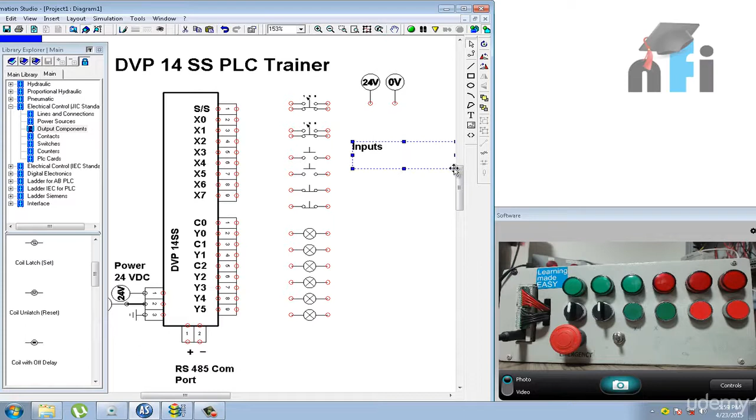So starting with the PLC make. This is Delta PLC 14SS. Now this 14 represents the total number of inputs and outputs. So these are the inputs. I can also write it here. These are my inputs. Now inputs in this PLC are designated by X, starting from X0 to X7.

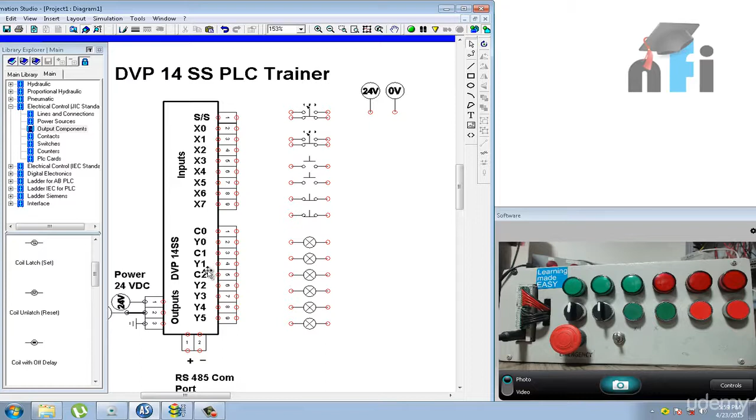So let me just put these names as inputs, and these are my outputs similarly. Now outputs are signified by Y: Y0, Y1, Y2 and up to Y5. These are my outputs. So in PLC we have inputs and outputs, and in this trainer, if you see here, this is the PLC trainer. You can see the inputs and outputs from here.

All right, these are the inputs. Let it focus. Yeah, these are the inputs starting with SS. Now this SS is sink source. I will explain to you what that is. And the inputs are X0 to X7. So we have 8 inputs.

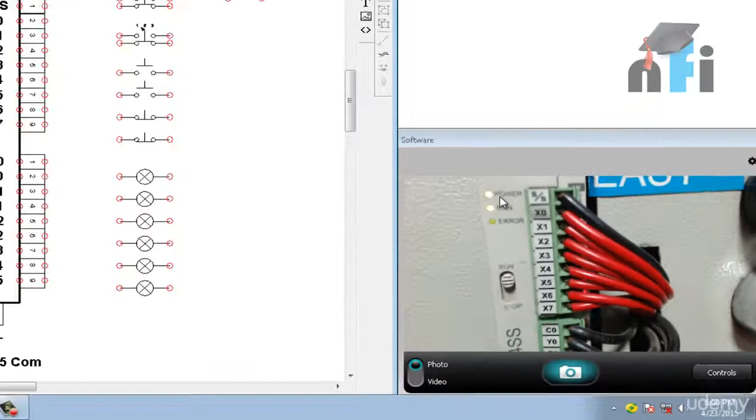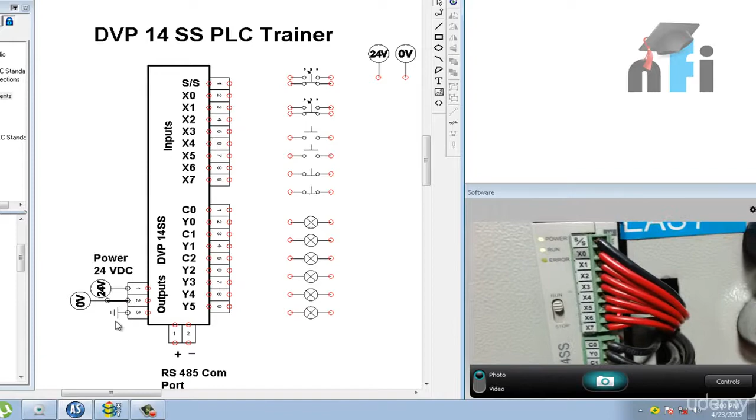And here we have a power LED. This is the power LED, this is the run LED, this is the error. So the PLC is powered. The PLC has been given a power of 24 volts and 0 volts. This is a DC power supply. This is the earthing. And the PLC is right now in run mode.

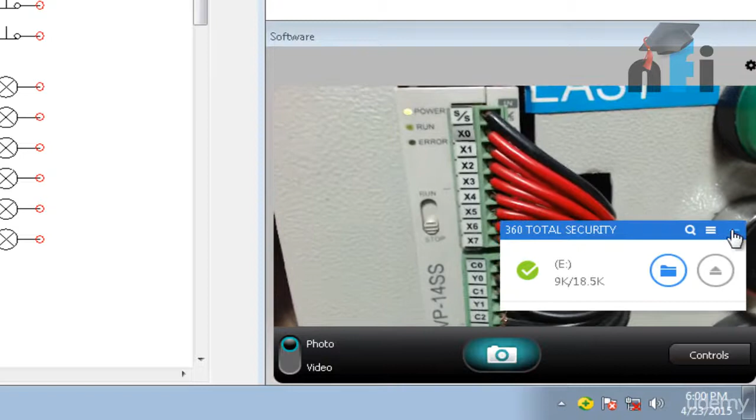So we'll see what the run mode is. Otherwise you can see this slider. This is at the run position. So the PLC is running. If I slide that to stop, the PLC will stop. Excuse me for that. So the PLC is in run mode right now. And you can also put it in stop mode. This is stop mode. Now this is run mode.

This is DVP14SS. These are the wirings going to the inputs, and these are going to the outputs. So in outputs we have C0, Y0, C1, Y1, C2, Y2, Y3, Y4 and Y5. The same has been depicted here. I'll explain from this diagram how I have connected the inputs and outputs to this PLC.

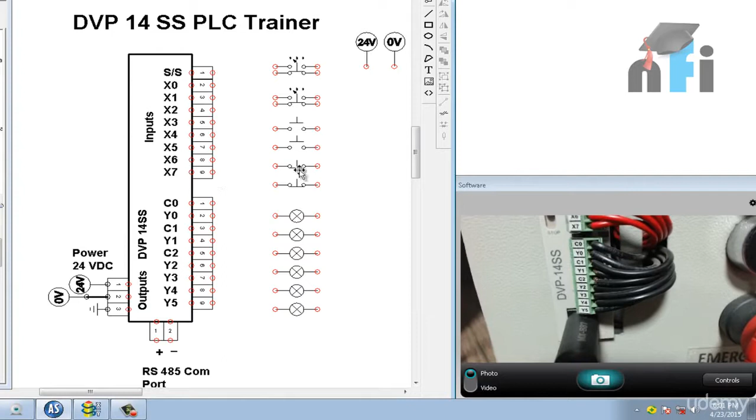In this trainer, these are the indicators, 6 indicators, and these are the switches. Now this is a 3-way switch. It goes like this: 1, 2 and 3. So we have two 3-way switches here. I have taken two 3-way switches, this one. Then I have an NO switch.

These are the NO switches. 2 NO switches and 2 NC switches. The symbol of the NO switch is this one. The symbol of NC is this one.

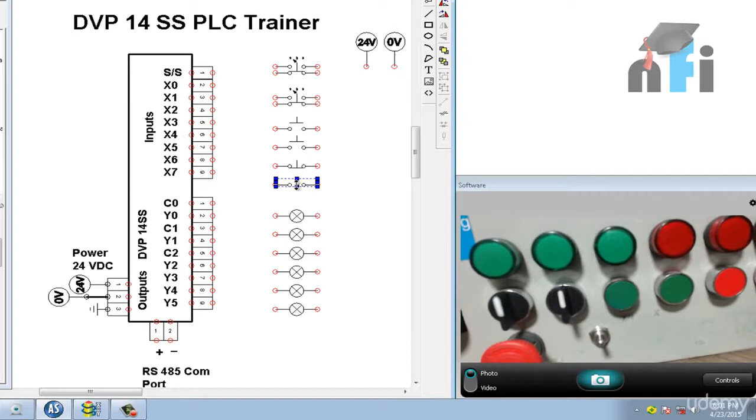This is my main emergency. This is to start and stop the PLC. I can power down my PLC from this emergency. I can power it up and power it down. This is the main control of my trainer. And this is the communication cable to program my trainer. So I'll keep the camera here.

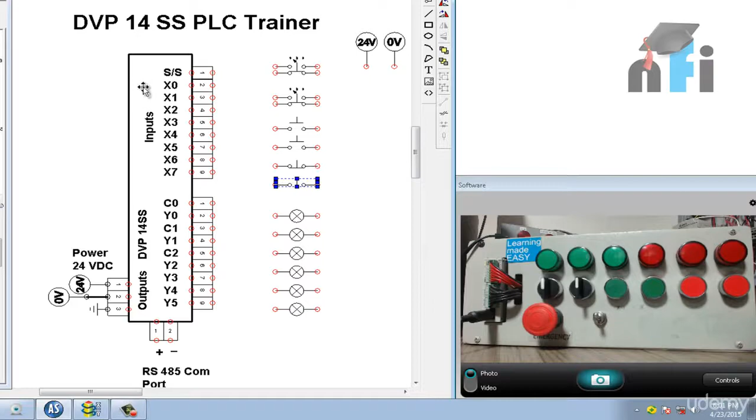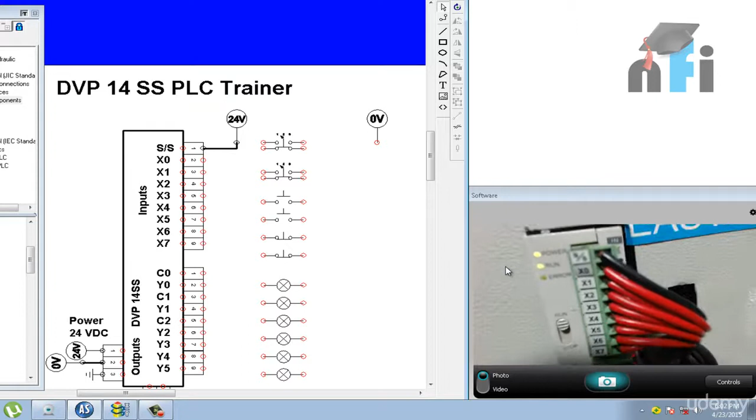Now, how to wire the PLC? Initially we have the terminal sink source. We have understood what sink source is in the previous videos. We have connected 24 volts directly to the sink source of our trainer. This sink source, I'll show you again, is here, the top terminal. It is given 24 volts directly from the power supply. So you need to have a 24 VDC power supply in your trainer as well. You have to arrange it because this is a DC PLC.

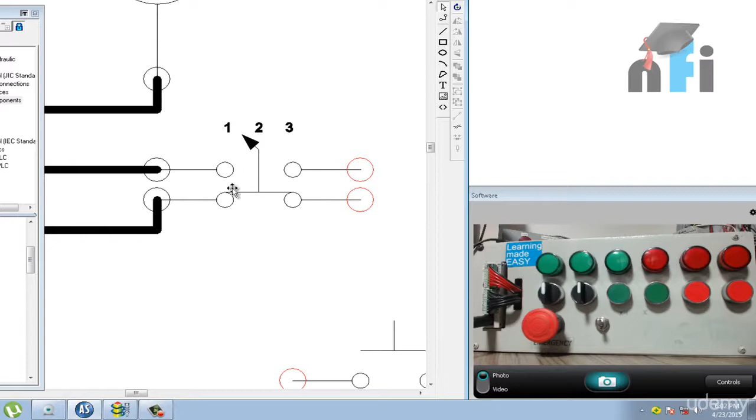Now, how is X0 connected? We have taken this selector switch, and one end goes to X0 here, another end goes to X1. So your 3-way selector switch has 4 terminals, 1, 2, 3 and 4. This is at the below terminal. This is at the selector's position 1 right now.

Okay, I'll show you how it works. Then what we have done is we have taken another selector switch and connected it in a similar way. So one goes to your X2, another goes to X3. Okay, then you have a push button. The push button is connected to X4, another push button NO, this is NO, it's connected to X5. This is not 7, this is X5. Then you have 2 NC switches connected to X6 and X7.

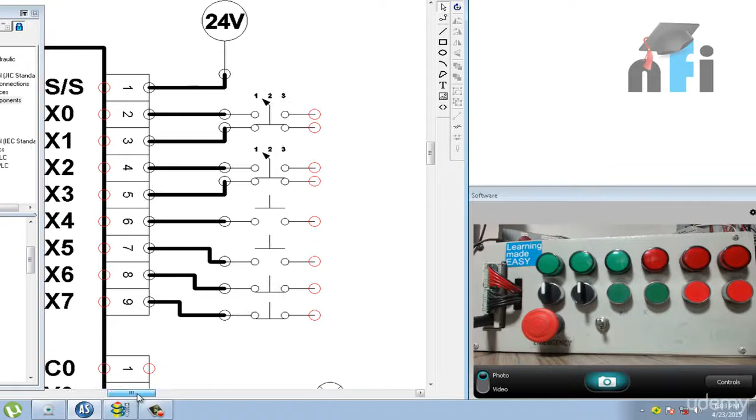So one end goes to the PLC input of these input elements. Okay, now what about the other end? So if you remember the sink source principle, if you're connecting 24 volt to the common or the sink source terminal, you have to connect 0 volt to the other end. So the other end will be shorted. It is actually shorted in the trainer and is given 0 volt, like that. That's the way to connect your input switches to your PLC.

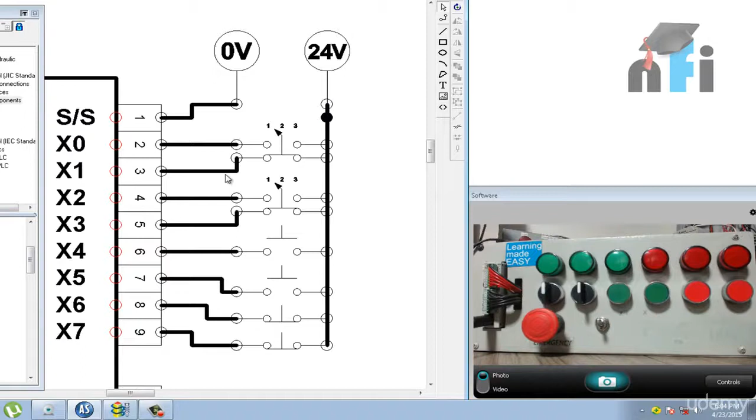There could be another way. You can shift that. You can either connect 0 volt to your sink source and 24 volts to the back of your inputs. This will also work. This kind of wiring will also work. Okay, so it's totally up to you how you want to wire your PLC. Both ways can be done. So that's how inputs are wired in my trainer, right?

In the outputs, what we have done is we have the common. So we have connected 0 volt to our common. Our common is looped with 0 volt. I will loop it like that. Okay, the common is looped with 0 volt. So C0, C1, C2 is given 0 volt, and the output of my trainer is connected to the indicators like that. I hope this makes sense.

So we have 6 indicators here. Outputs starting from Y0 to Y5, these are the 6 outputs. So the output will get 0 volt from the PLC. These indicators are working on 24 VDC. These are DC indicators. Okay, so one end goes to the PLC and the other end should be shorted and should be given 24 volts from the power supply.

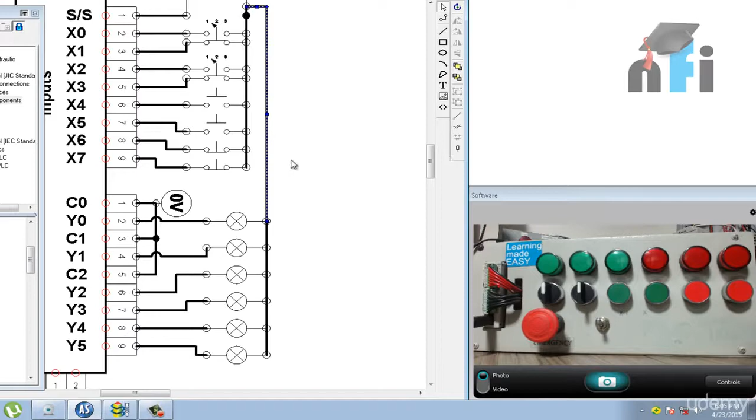Okay, so we have a power supply. We can short this wire like this. Okay, so 24 volt is coming from the power supply to one end of the indicator, and the other end goes to the PLC outputs. These are the outputs. You have to connect switches to the inputs and indicators to the outputs.

Then you have the RS485 communication port. This is at the bottom of your PLC. This is to connect the PLC with the HMI. You can connect your HMI via this port and you can communicate, monitor and control the inputs and outputs. That's the power supply. So these are the only terminals this Delta 14SS PLC trainer has over here.

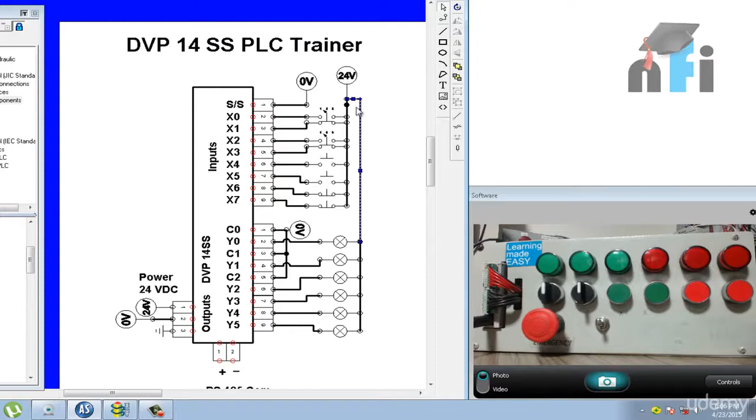Now let's see how we can monitor these inputs in our software. The software which you are going to use is WPLSoft. Okay, I can show you the software. This is WPLSoft version 2.36. If you want the software, you can get it from this website. This is available free of cost. This is freeware. You can also do simulation in WPLSoft, right?

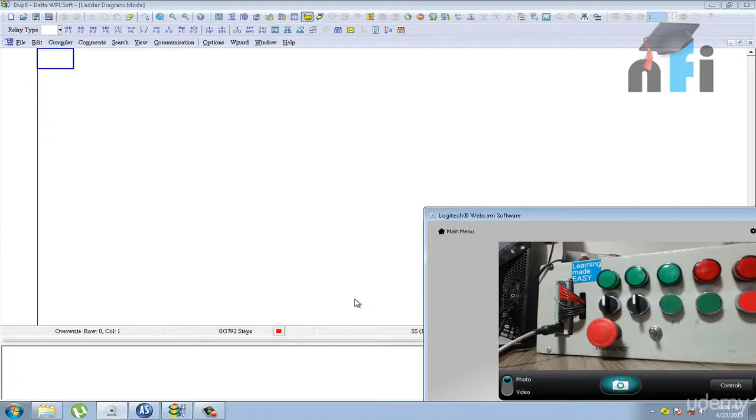Now you have to make sure your PLC is connected. So we have this cable. This is the PLC cable. This is the 232 communication port. This is connected to the back of the PLC trainer. Alright, so you must ensure your cable is connected. Once your cable is connected, you have to open the software and you have to link your PLC.

In that case, you will go to the communication option, communication settings. Okay, in this communication setting, you have to select the type of connection. So our connection is 232. We don't have Ethernet, it's 232. Then you have to select your COM port. The COM port is very important.

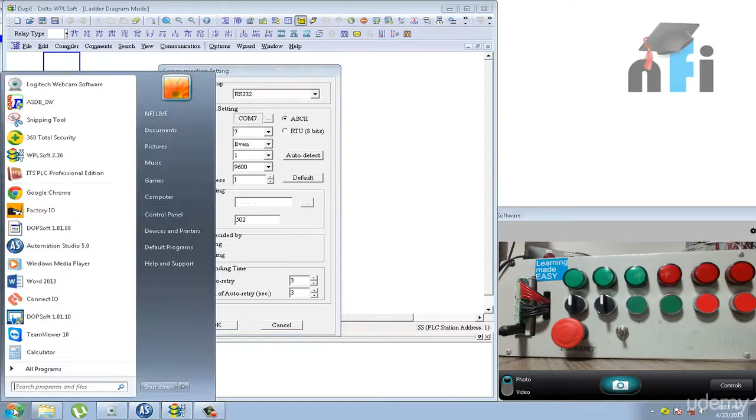If you are connecting this PLC to a desktop, then you will have COM1 here. Okay, although I'm using a desktop, my COM port is damaged, so I'm using a USB to serial converter. In that case, my COM port is COM7. I can show you that. You go to control panel and then you go to device manager, which must be here. That's the device manager. Then you check your ports.

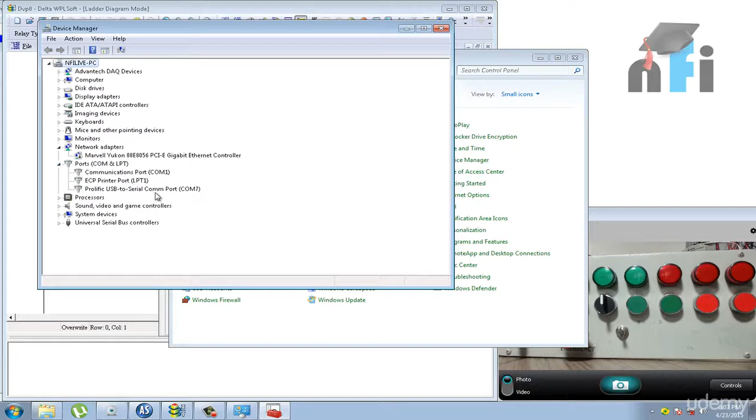So in my case, I'm using a USB to serial converter, which is linked with COM7. That's the COM7, right? If you're using USB to serial, you must install its drivers, then it will give you a COM. So in our case, it's COM7. Rest will be default. Okay, it will take default, and then you have to click auto detect and let your software find the PLC. So it finds the PLC, which says it is SS because we are using SS series.

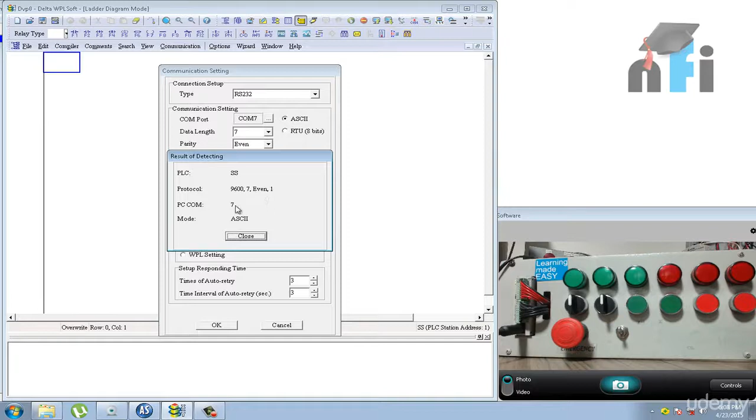These are the protocols. 9600 is a baud rate, 7 is a data length, even is a parity, 1 is a stop bit. COM port 7, mode is ASCII. So we have ensured the PLC is connected. Okay, so I'm going to make a dummy program and download that to PLC. In fact, I'll just write the blank program. I'll just write the end because we are just going to monitor it.

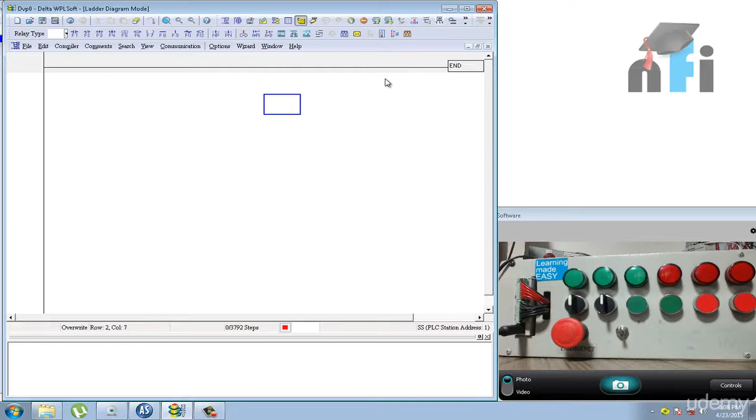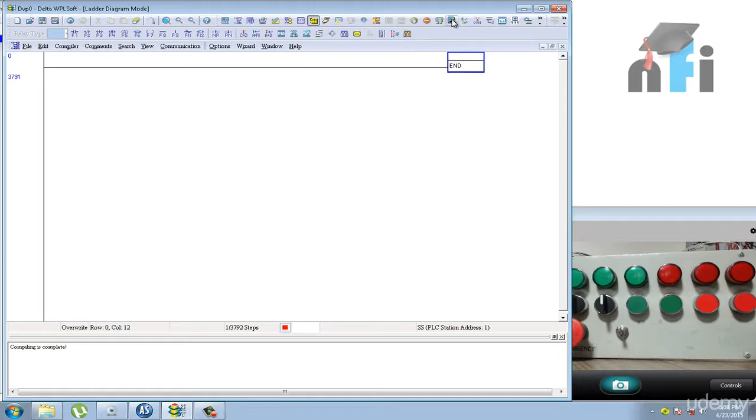Alright, now I'll download that to PLC. This is the option, write to PLC. Click on that and then click OK, click yes and yes. So the dummy program, which is nothing, only the blank program, is downloaded. Now I'll go to online mode, because we are just doing monitoring, we are not programming it. Then you go to edit monitor devices.

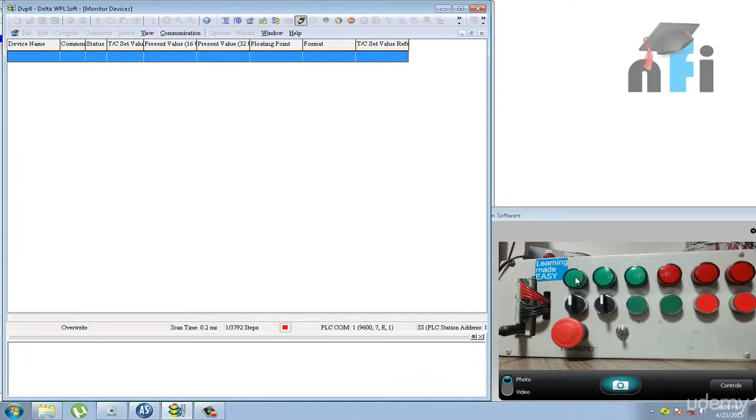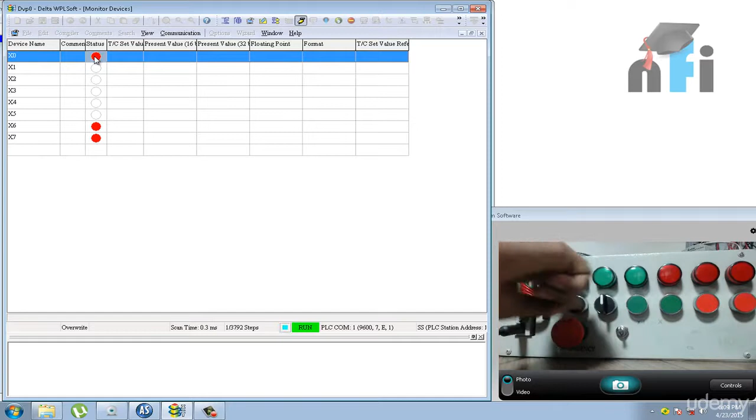Alright, now here we want to see how our inputs are connected. So starting with X0, I'll just type X0 and press enter. X1 enter, X2, X3, X4, X5, X6, X7. So we have 8 inputs. Now you see here X0, this is the current status of my PLC. Right now X0 is off, so if I turn on X0, it will show X0 is on in the software. I can move it like this. Okay, X0 is on. Next is X1.

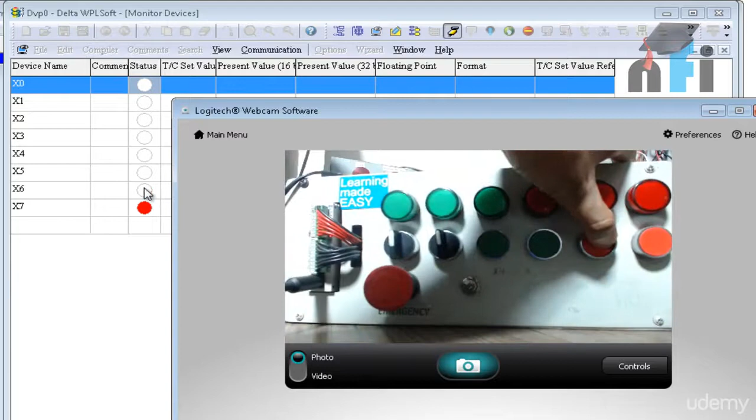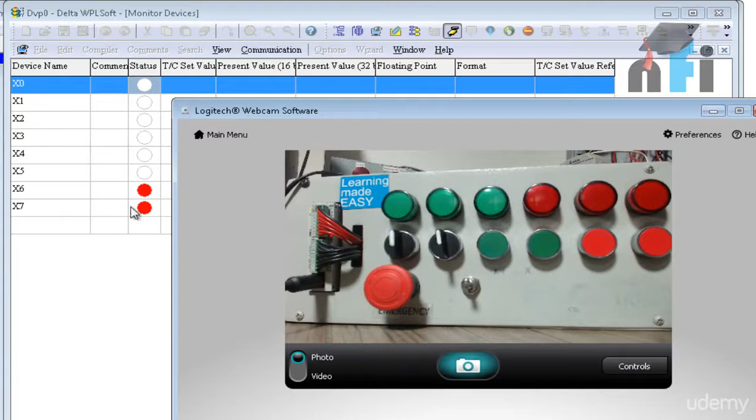So this says X1 is on. Then we have X2. This is X2. This is X3. And then we have X4. This is X5. Now this is NC, that's why its status is already high. It is passing the signal, it is making the circuit. So if I press this button, it will show X6 is off, and this is for X7. So these are the inputs, how we can link the inputs, how PLC detects the inputs. If you do the correct wiring, you will see the status. If you're not seeing the status, it means there's some problem in your wiring.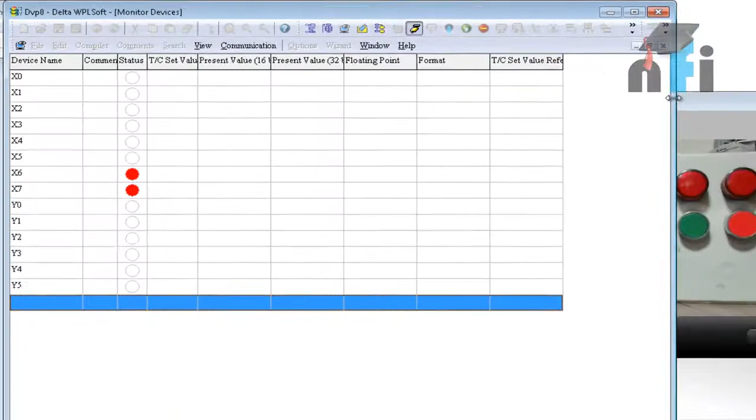Now let's see the output. Y0, Y1, Y2, Y3, Y4 and Y5. Alright, now output I can directly turn on from my software. Hold on. These are my outputs. What I can actually do is I can do set on, and you can see which output is getting on. So this is your Y0. Okay, this is Y1, this is Y2, Y3, that's Y4, and that's Y5.

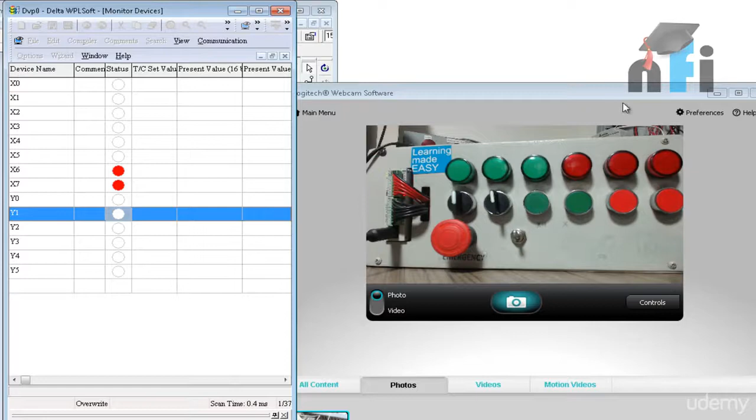Alright, so these are the outputs. You can also turn all of them on, it's up to you. Okay, so this was how you can turn on and off the output, and you can monitor which output is connected to which terminal. Okay, so next we'll see how to download and upload the program. A small demo of downloading and uploading the program in Delta WPL.

So let me extend the line. I'll go back to my ladder mode. This was the monitoring mode. From here, you click on the ladder diagram, you'll go to the ladder diagram. So when you want to download the program, you have to make sure your PLC is not online. This is online, PLC is running. Offline the PLC. Now I need a space before the end, so I'll press Ctrl I.

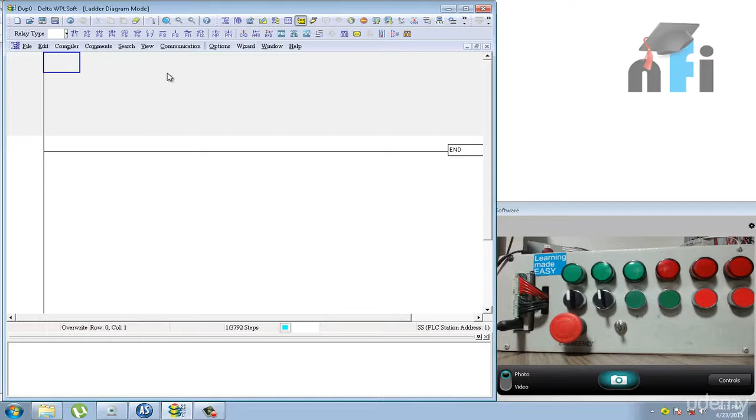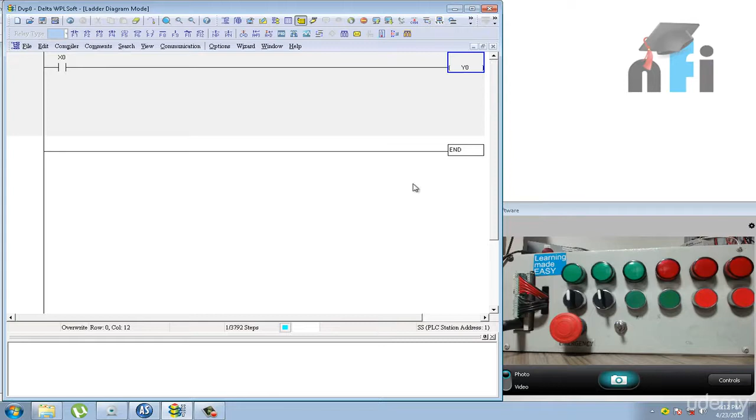Now let's write a simple program to turn on the output using one input. So I'll write LD X0. LD X0 is my NO contact of X0 switch here. Then I have to write OUT space Y0. OUT space Y0 is out Y0. This will turn on my Y0, which is this one. Now to download the program, you have to follow the same steps. First, code the program, compile, write to PLC, press OK and yes again, then click online.

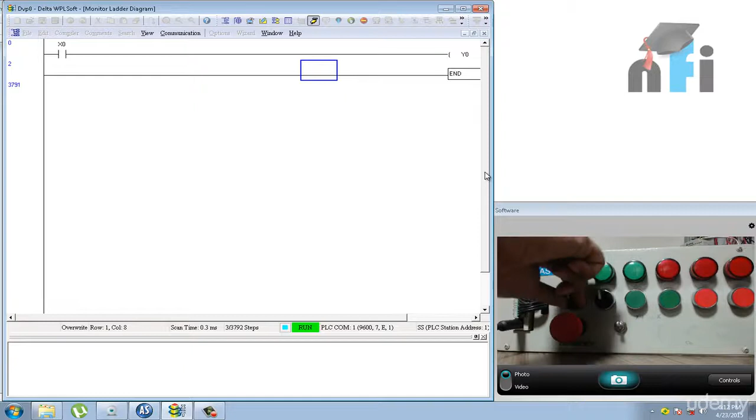Now the program has been written and this is online, so if I turn on my X0, it will turn on my Y0. So this is simultaneously monitoring the status. I hope this makes sense. Now this was how to download the program.

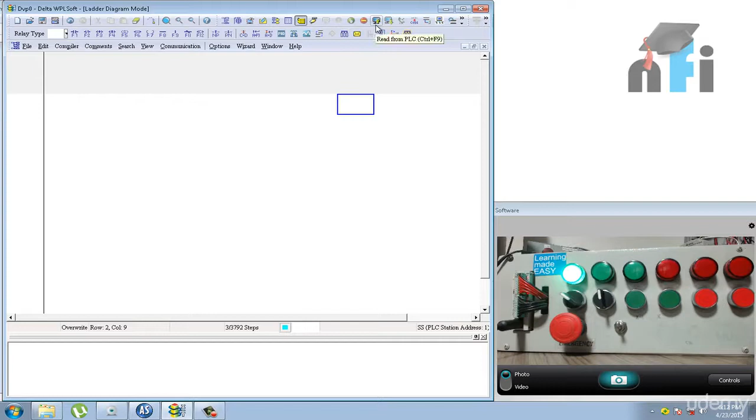Suppose you are working on your program and you lost the program, you don't know what program was inside it. So what you can do is upload the program from the PLC. You can transfer the logic from the PLC to your software. In that case, you have to click on this button, read from PLC. Once you click on this button, you'll find the communication mode PLC to PC. Click OK, yes and OK. So you will get your program right in your software.

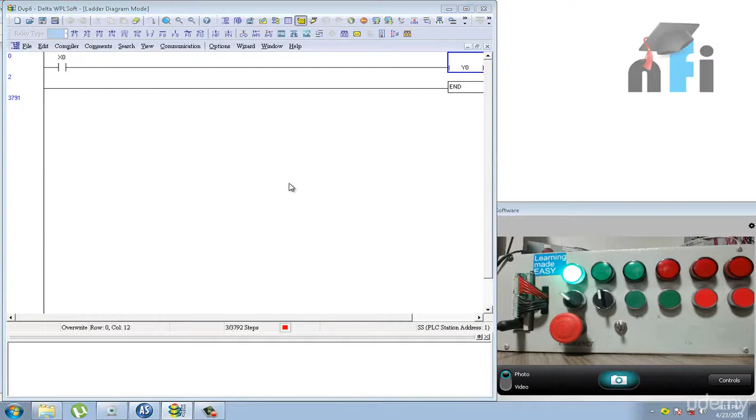And then if you want to save your program, go to File, Save As, and then go to your desktop, save the program, Project 1, click Save. So if you save it and close it thereafter, you can again open the software; it will be saved with the extension DVP.

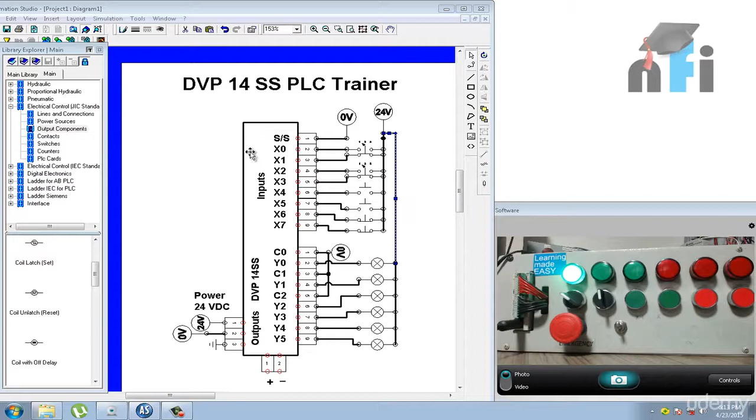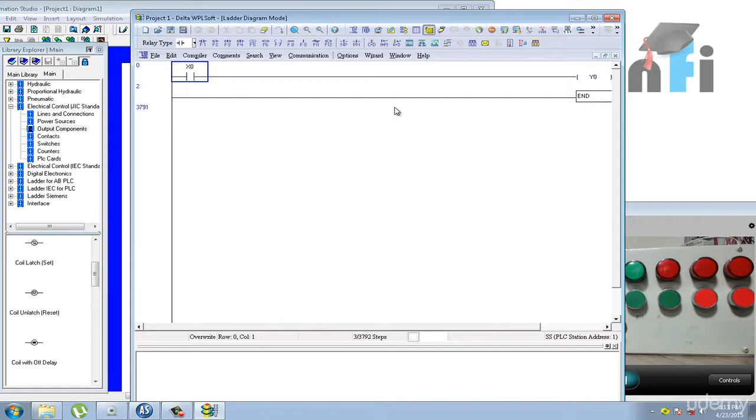So you can again open the last program which you have saved, just like you work on Microsoft Word. Click File and click Open. Project 1 must be on the desktop. This one. So that's your program. So this is how you can save, close, and open your program. So this was about how to work with the PLC, how to download and upload the program.

Now let's take a situation when you don't have the PLC. If you're a student and you can't afford the PLC, you can work on simulations. To do that, let me just turn off my PLC. So now there is no PLC. My software doesn't recognize any PLC. Or if you want, I can remove this communication cable just to make sure that my PLC is not connected.

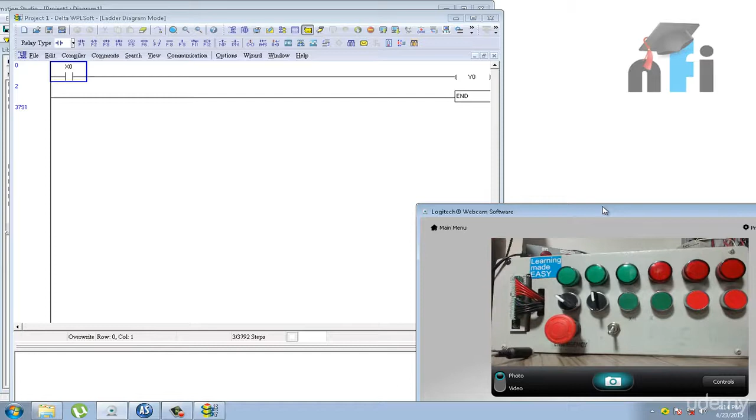In that case, you have to click on this symbol, simulator. Click this one. It will show you simulator, and if you get some message like that, allow the access. You must notice this should be simulator. Right now the software will act like you have the real PLC with you. So if this is my logic, I have to code it first, compile, write to PLC, click OK, and then go online.

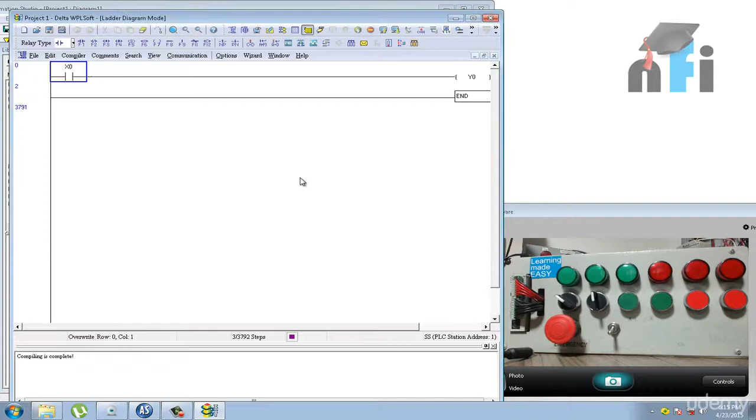Sometimes you may find the timeout error. In case you found the timeout error like the one you have seen right now, because many times you will encounter issues like timeout, close your program, then go to WPL, right click on that, go to properties, and in compatibility click on run this program in compatibility mode for Windows XP, and select run this program as an administrator. This is mandatory. Click apply, click close, then open the same logic which you saved.

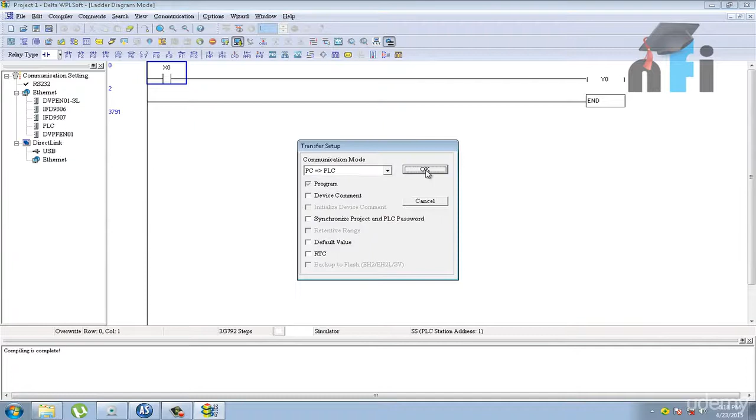It will ask you for confirmation, and this time it may not show you the timeout error. So let's check that. Go to simulator, you have a simulator here, compile, download, click OK. It has downloaded now. Click on online, so you get online; it says it's stopped, run the PLC from here. Now how to turn on the X0?

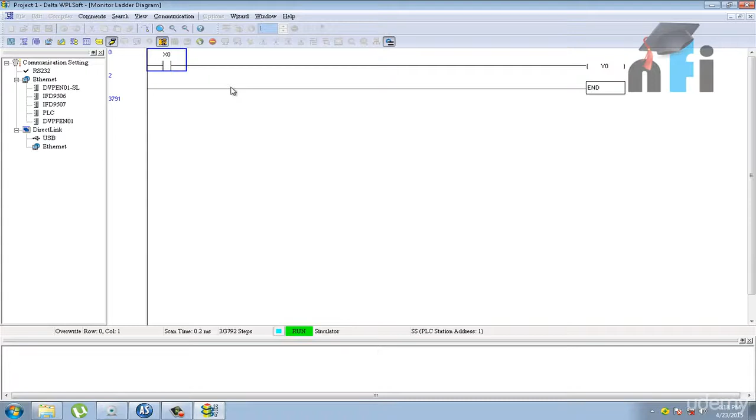You don't have the inputs, so right click, set on. The output is on. Right click, set off. So now you can work by right clicking the input and doing set on and set off to check your logic. So this is how you can work on simulations in Delta WPL software. And if you want to download this software, go to help or go to the website delta.com.tw, and you can find the software in the download section. So this is about introduction to the PLC trainer of Delta DVP 14SS.